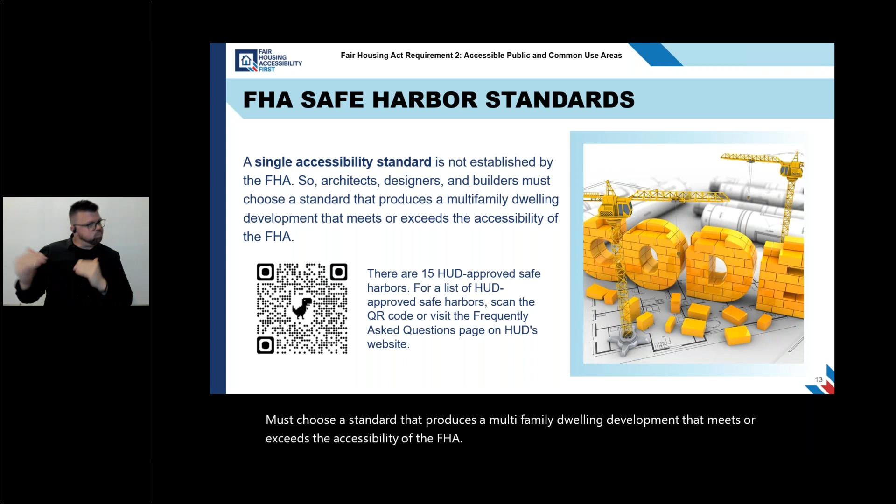FHA Safe Harbor Standards. A single accessibility standard is not established by the FHA. So architects, designers, and builders must choose a standard that produces a multifamily dwelling development that meets or exceeds the accessibility of the FHA. Experienced building professionals employ verified and objective standards known as safe harbors to ensure compliance with the FHA.

There are 15 HUD-approved safe harbors. And for a list of HUD-approved safe harbors, scan the QR code or visit the Frequently Asked Questions page on HUD's website.

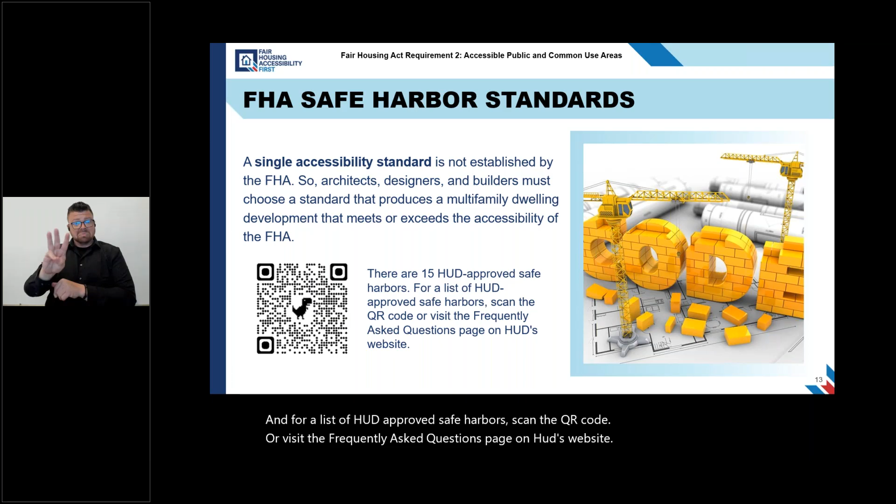Fair Housing Accessibility Guidelines. The intent of the FHA is realized by the 7 requirements of the Fair Housing Accessibility Guidelines, also referred to as the guidelines. The 7 requirements establish minimal levels of accessibility. They apply to covered multifamily dwellings designed and constructed for first occupancy after March 13th, 1991. Today's training focuses on the technical specifications in Requirement 2, accessible and usable public and common use areas.

The guidelines establish ANSI A117.1, 1986 version, as a minimum standard to comply with when designing these areas. The Fair Housing Act Design Manual, page 2.4, includes a chart that identifies ANSI scoping specifications for public and common use elements and spaces that must be accessible.

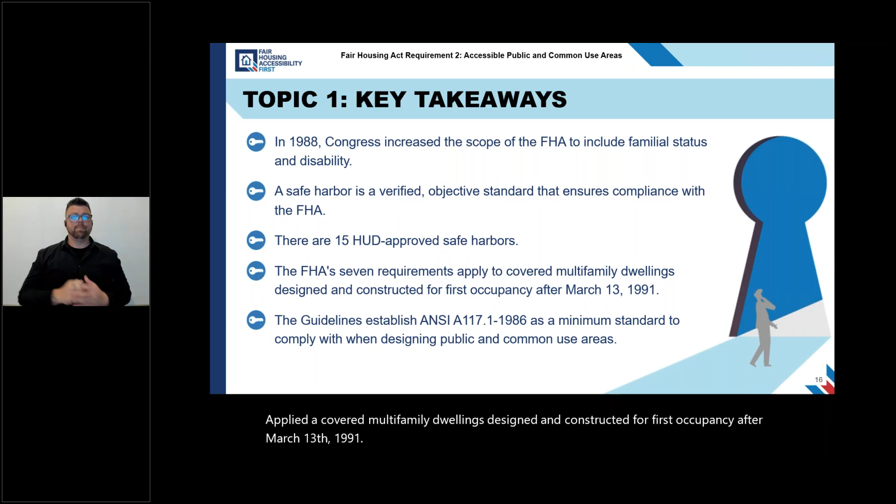And lastly, the guidelines establish ANSI A117.1-1986 as a minimum standard to comply with when designing public and common use areas. And with that, it's going to take us into topic 2, what's covered in requirement 2.

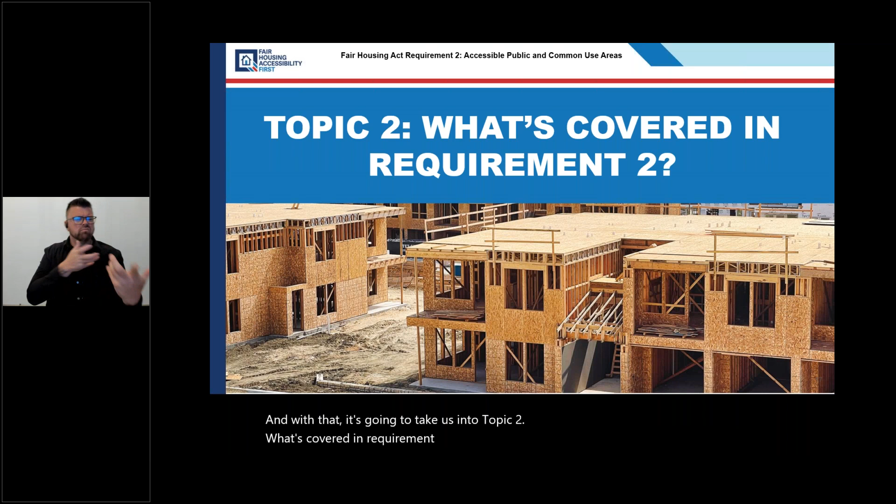What's covered? Entrances and routes. Requirement 2 ensures that individuals with mobility challenges can access all the public and common use spaces on an FHA covered site. The benefits of requirement 2 rely on the specifications in requirement 1 and can only be fully realized if buildings on a site have an accessible entrance on an accessible route.

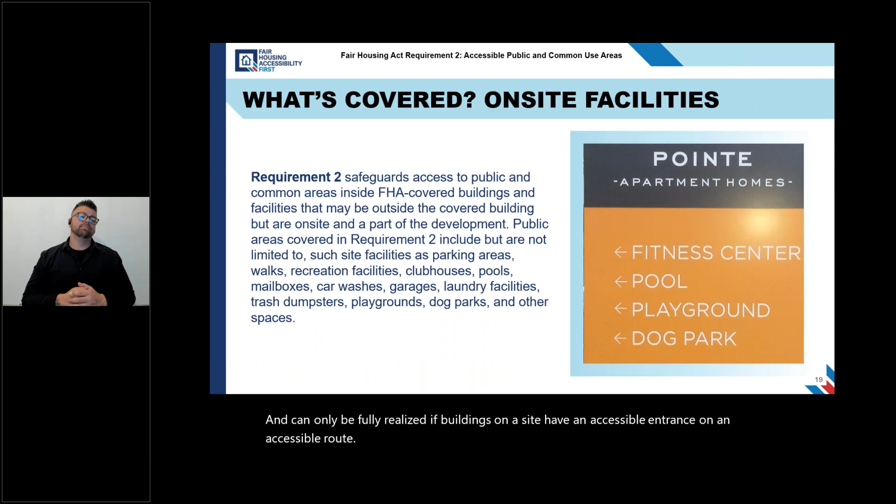What's covered? On-site facilities. Requirement 2 safeguards access to public and common areas inside FHA covered buildings and facilities that may be outside the covered building but are on site and a part of the development. Public areas covered in requirement 2 include, but are not limited to, such site facilities as parking areas, walks, recreation facilities, clubhouses, pools, mailboxes, car washes, garages, laundry facilities, trash dumpsters, playgrounds, dog parks, and other spaces.

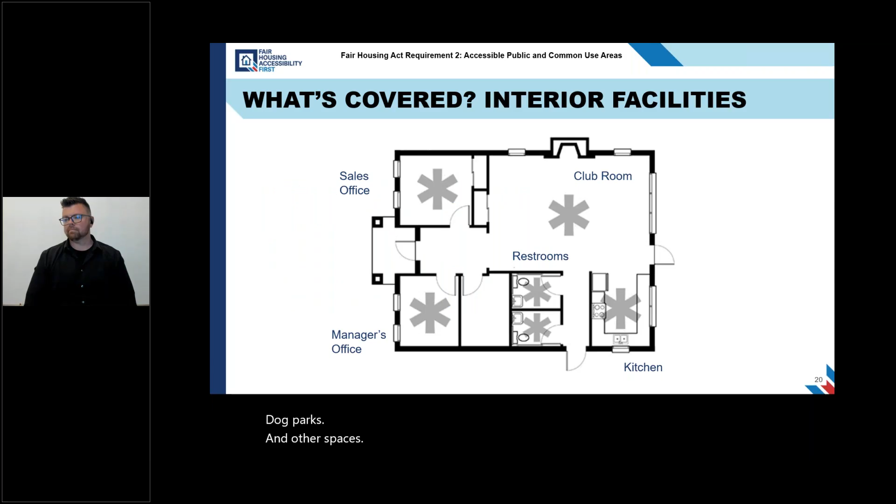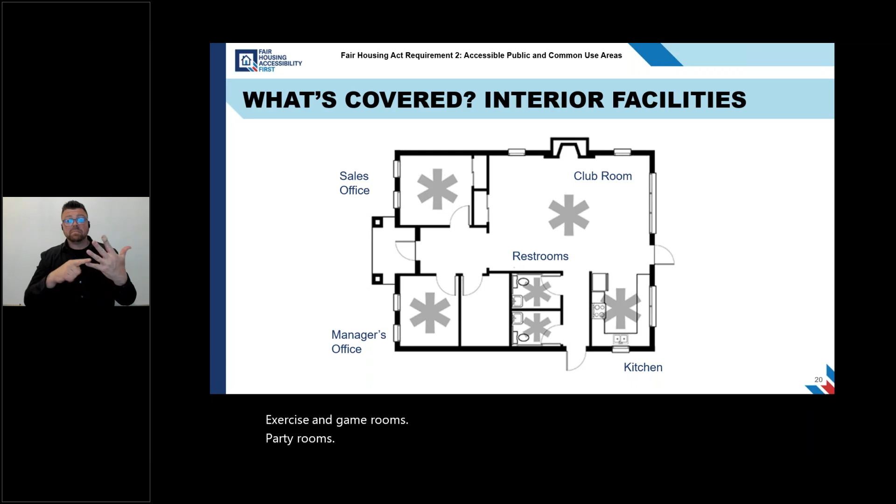What's covered? Interior facilities. Public and common use areas include interior facilities such as rental offices, toilet and bathing rooms, exercise and game rooms, party rooms, kitchens, office centers, and other spaces.

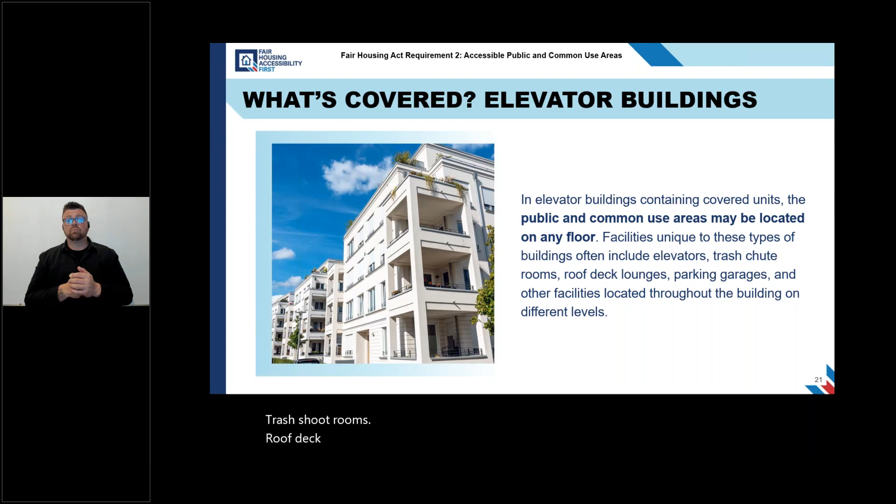What's covered? Elevator buildings. In elevator buildings containing covered units, the public and common use areas may be located on any floor. Facilities unique to these types of buildings often include elevators, trash chute rooms, roof deck lounges, parking garages, and other facilities located throughout the building on different levels.

Residential housing with 2- and 3-story walk-up type buildings with single-story dwellings on the ground floor, only the ground floor dwellings are covered and must comply with the accessibility requirements. Since the upper floors in these types of developments are typically not served by an accessible route, public and common use areas, including the stairs going up, the halls, corridors, breezeways, and the entry doors on the upper levels are not covered.

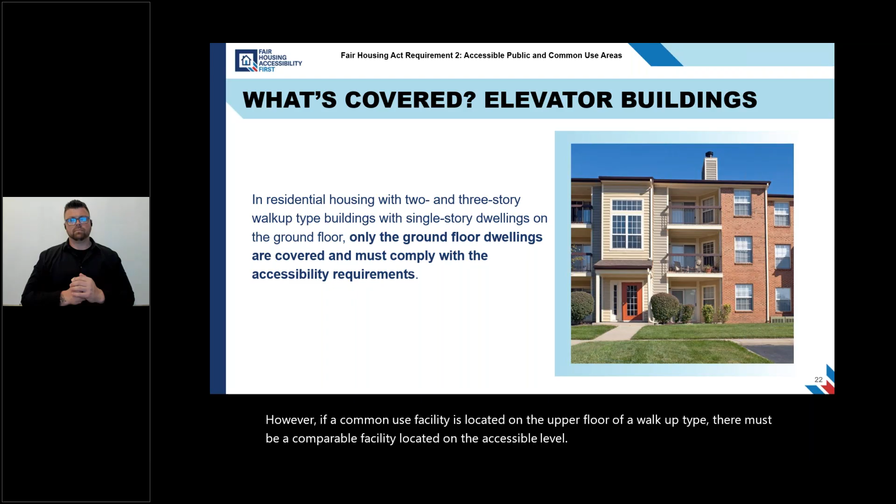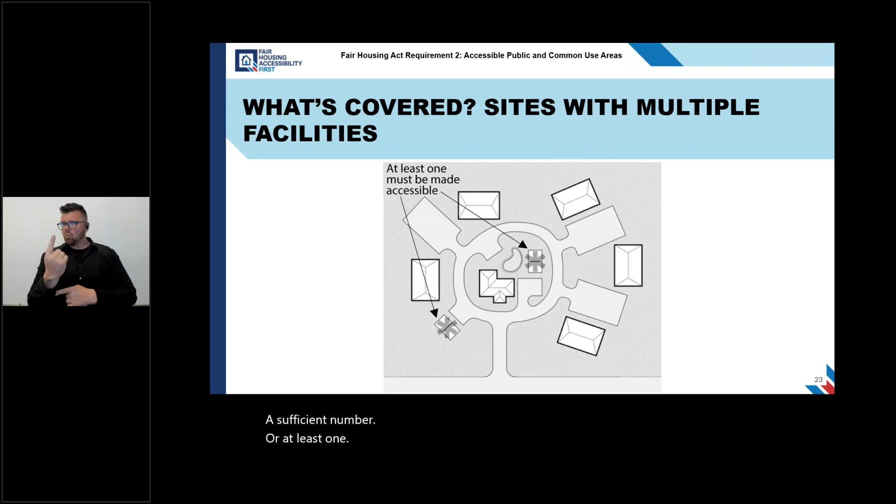However, if a common use facility is located on the upper floor of a walk-up type, there must be a comparable facility located on the accessible level. What's covered? Sites with multiple facilities. On a site where multiple public and common use facilities occur, a sufficient number, or at least one, of accessible facilities of each type must be made accessible to ensure equal opportunity for use by persons with disabilities.

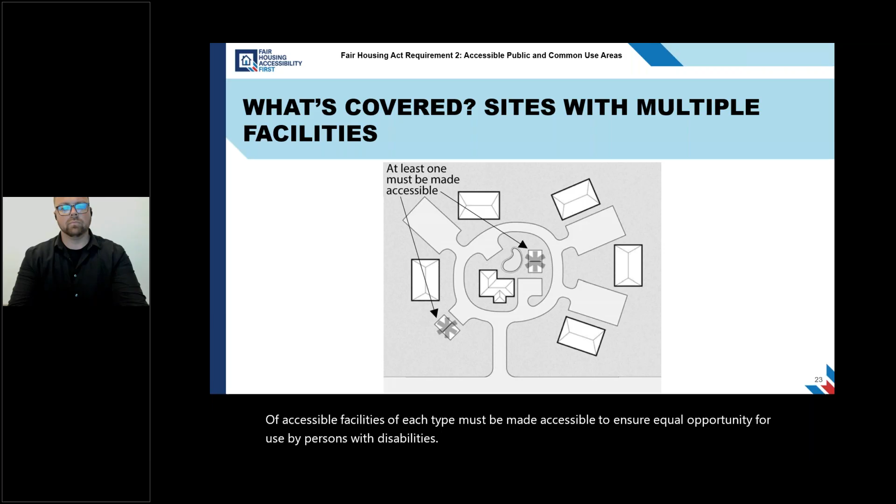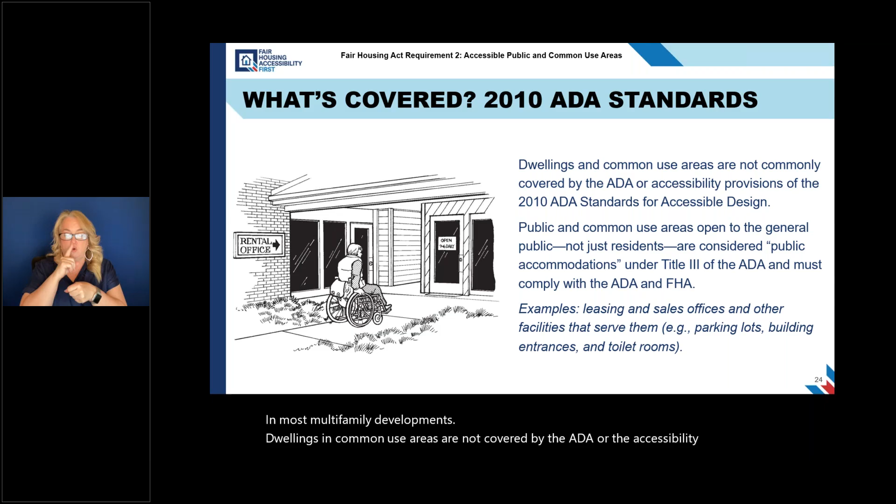More detail. What's covered? 2010 ADA standards. In most multifamily developments, dwellings and common use areas are not covered by the ADA or the accessibility provisions of the 2010 ADA standards for accessible design. However, portions of public and common use areas that are open to the general public and not just to residents of the development are considered public accommodations under Title III of the ADA and would have to comply with the ADA and FHA.

Examples of such common use areas are leasing and sales offices and the other facilities that serve them, such as parking lots, building entrances, and toilet rooms. When designing a feature to which both the FHA and ADA apply, check both applicable standards and choose the standard that provides the most accessibility.

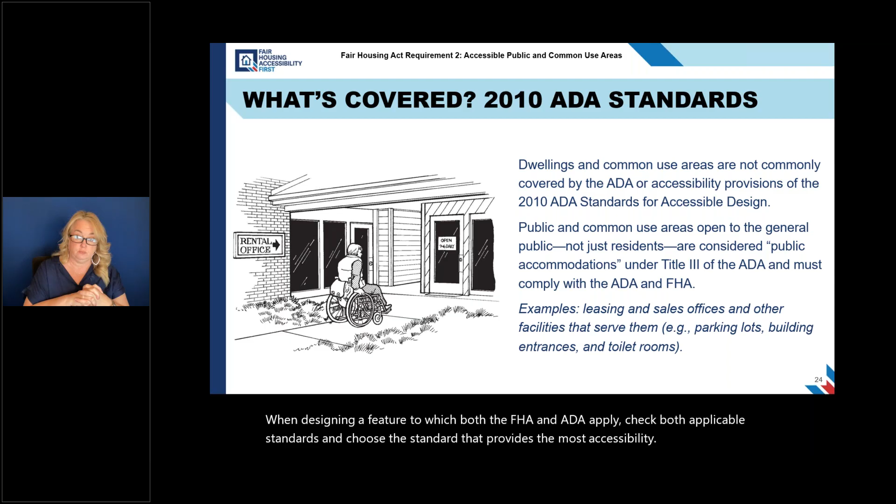And that leads us to our second knowledge check, which reads, portions of public and common use areas open to the general public must comply with which? First option, FHA and ICC. Second option, ADA and FHA. And the third option, ADA and ICC. I'll go ahead and launch this poll.

And again, this knowledge check reads, portions of public and common use areas open to the general public must comply with which disability rights law? First option, FHA and ICC. Second option, ADA and FHA. And the third option, ADA and ICC. All right, we'll give folks a few more moments to get those selections in. All right, thank you so much. Go ahead and close that poll.

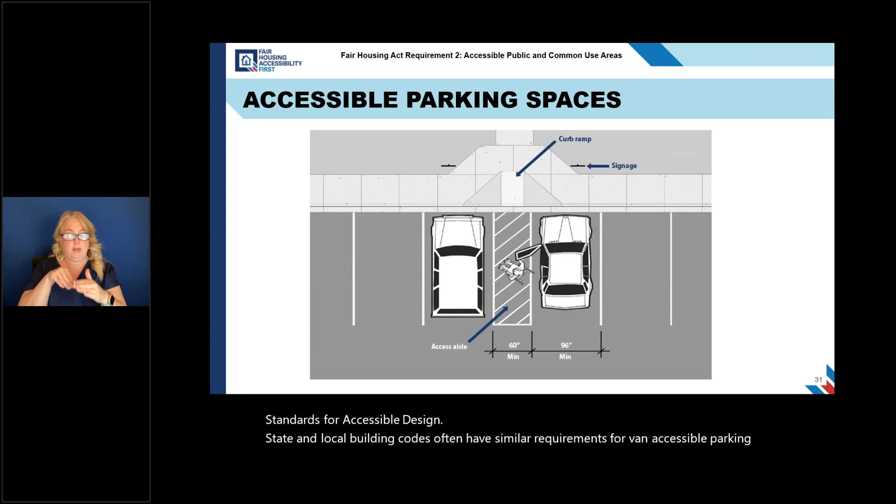Resident parking. In the provisions of Requirement 2 in the guidelines, minimum levels of accessible parking are established. For residents, 2% of parking spaces serving covered dwelling units and upon request by persons with disabilities. A minimum of one accessible space at each site facility where parking is provided, such as recreational facilities.

Visitor parking. For visitors, a sufficient number of spaces to provide access to grade level entrances of covered multifamily dwellings should be provided. A minimum of one space at a sales or rental office should be provided.

A sufficient number can be established by examining the total number of visitor parking spaces provided compared to the total size of a project. A one space minimum is required, but more should be provided if a large amount of visitor parking is provided for residents' benefit.

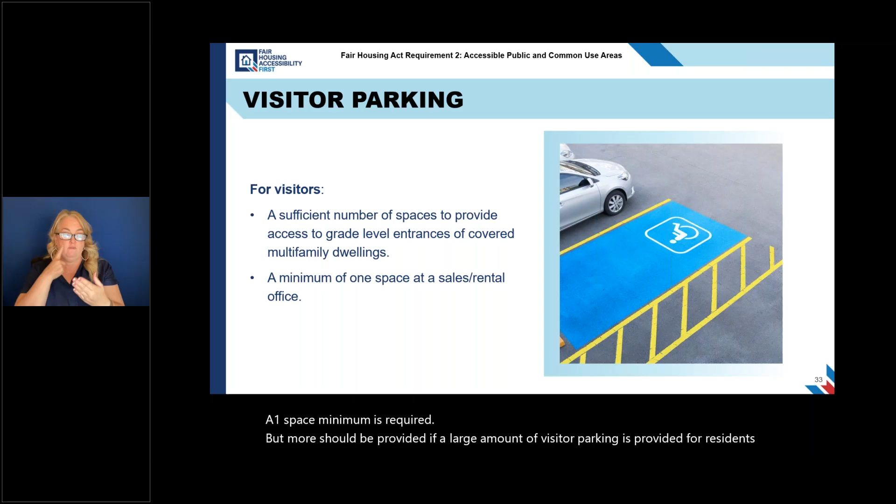And with that, we go into knowledge check 3, which reads, ANSI requires a 96-inch wide accessible parking space for parking for each site facility. The first option is true, and the second option is false. So go ahead and launch this poll. And again, this reads, ANSI requires a 96-inch wide accessible parking space for parking for each site facility. First option is true, second option is false.

All right, give a few more moments to get your selections in. All right, go ahead and close this poll. Thank you so much.

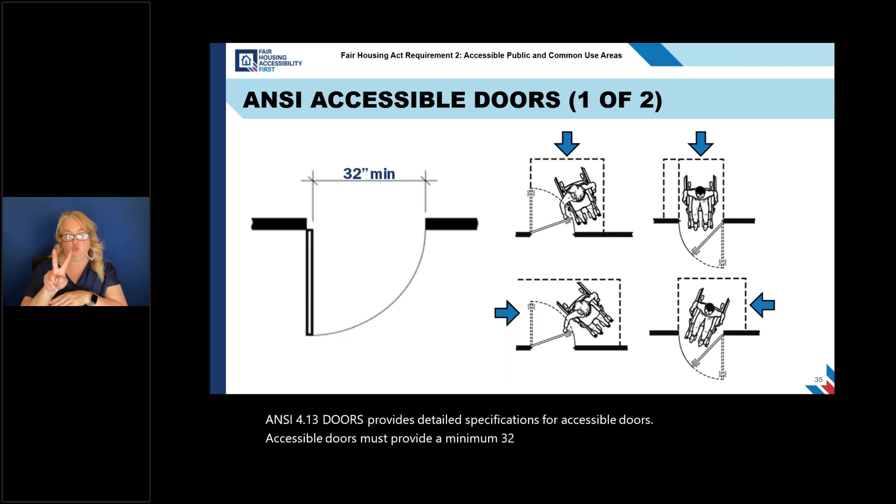ANSI, accessible doors. ANSI 4.13, doors, provides detailed specifications for accessible doors. Accessible doors must provide a minimum 32-inch clear opening measured between the face of the door and the opposing doorstop when the door is open 90 degrees. Accessible doors must provide maneuvering clearances that vary depending on the approach. Accessible doors must also meet threshold, hardware, and opening force requirements.

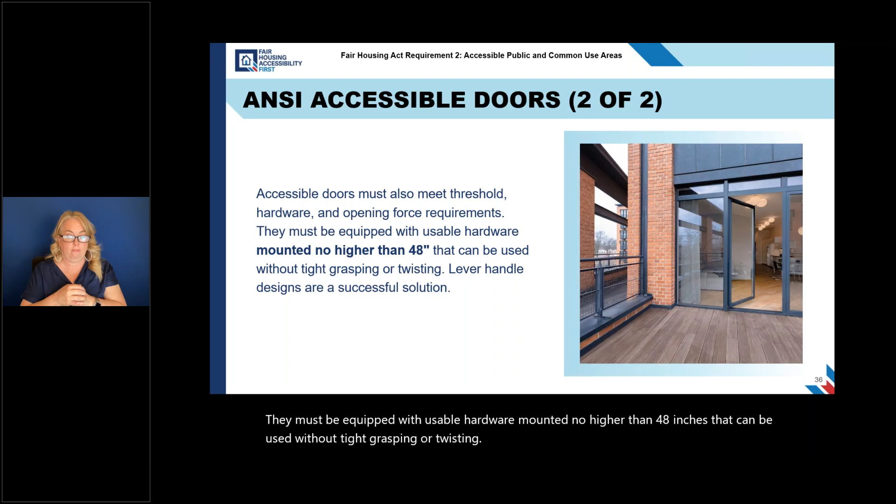They must be equipped with usable hardware mounted no higher than 48 inches that can be used without tight grasping or twisting. Lever handle designs are a successful solution. Recommendations for accessible doors include, but are not limited to, easy to read, permanent room signage with tactile characters, a side light or glass panel to assure the pathway is clear, and an optional auxiliary handle to aid in closing the door if it does not automatically close.

The door should swing easily with no closer. The force to open a door is limited by the requirement of 5 pounds for interior doors and 8.5 pounds for exterior doors.

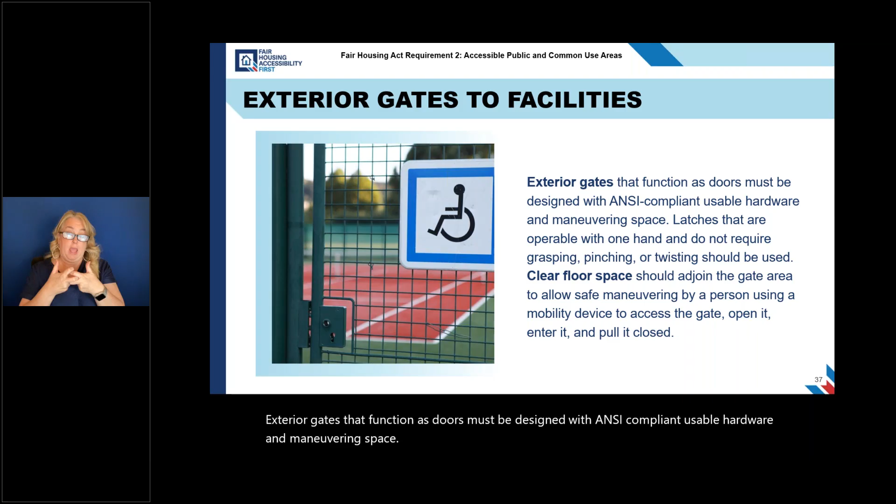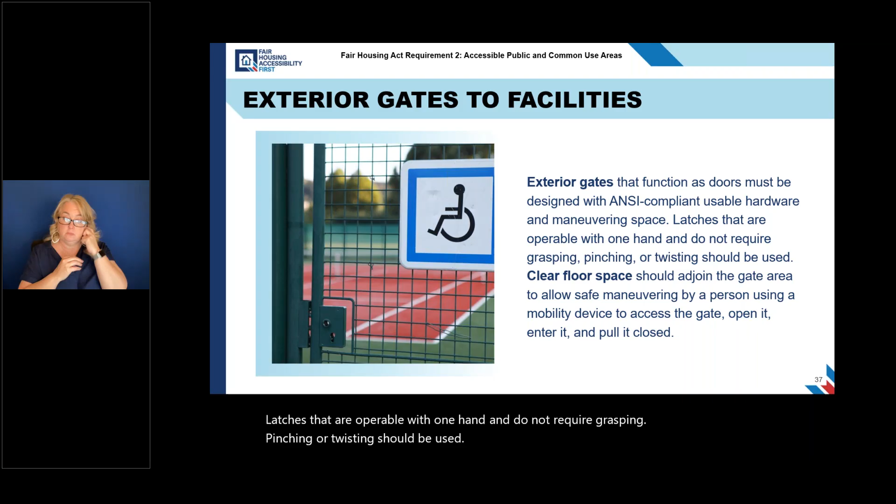Exterior gates to facilities. Exterior gates that function as doors must be designed with ANSI compliant, usable hardware and maneuvering space. Latches that are operable with one hand and do not require grasping, pinching, or twisting should be used. Clear floor space should adjoin the gate area to allow safe maneuvering by a person using a mobility device to access the gate, open it, enter it, and pull it closed.

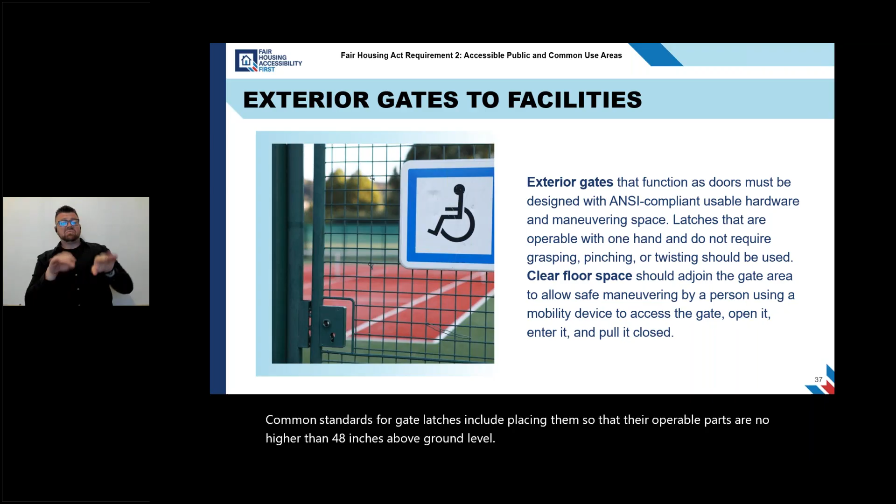Common standards for gate latches include placing them so that their operable parts are no higher than 48 inches above ground level. Some standards allow a height of 54 inches above the ground level at gates to swimming pools.

Laundry facilities. Laundry facilities must be on an accessible route in an accessible area. Where there are laundry rooms that serve each floor of an elevator building, each laundry room must be accessible. Likewise, where there is one laundry room on a ground floor in each building, each must be accessible.

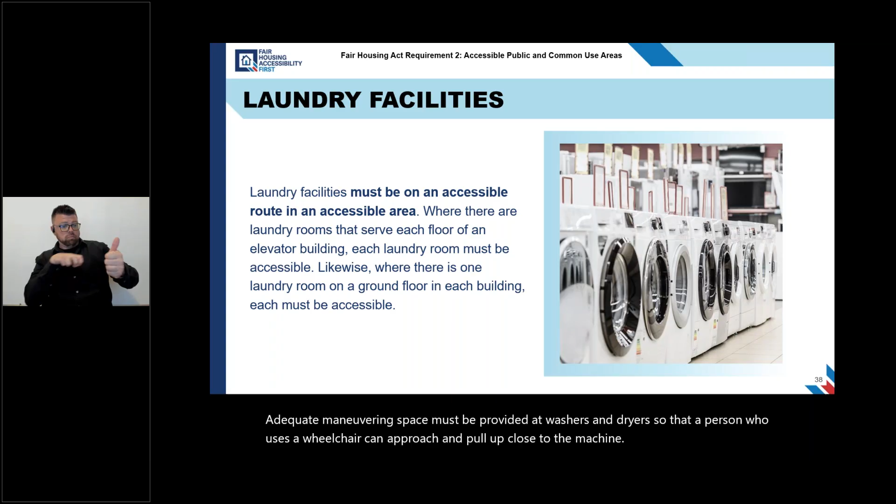Although front-loading machines are not required, adequate maneuvering space must be provided at washers and dryers so that a person who uses a wheelchair can approach and pull up close to the machine. The washer and dryer must have controls, including coin slots, within the reach range of a seated user. Please refer to the Fair Housing Act Design Manual, page 2.26 for more details.

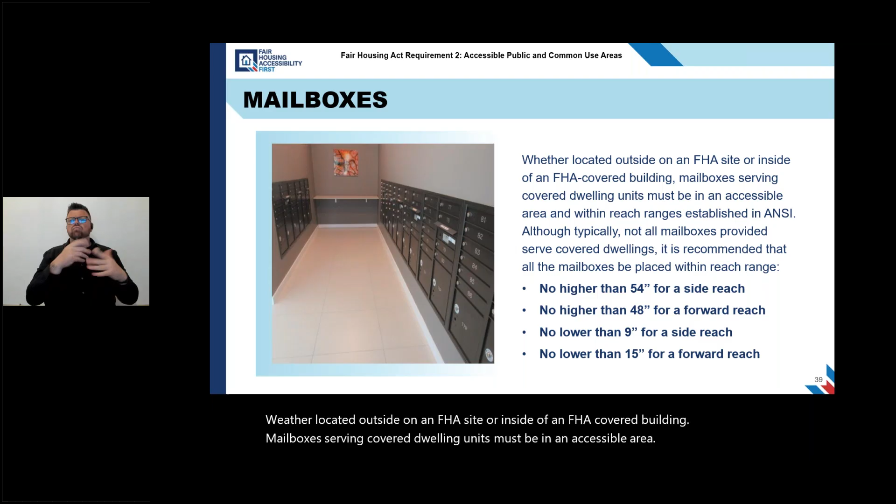Mailboxes. Whether located outside on an FHA site or inside of an FHA covered building, mailboxes serving covered dwelling units must be in an accessible area and within reach ranges established in ANSI. Although typically not all mailboxes serve covered dwellings, it is recommended that all the mailboxes be placed within reach range.

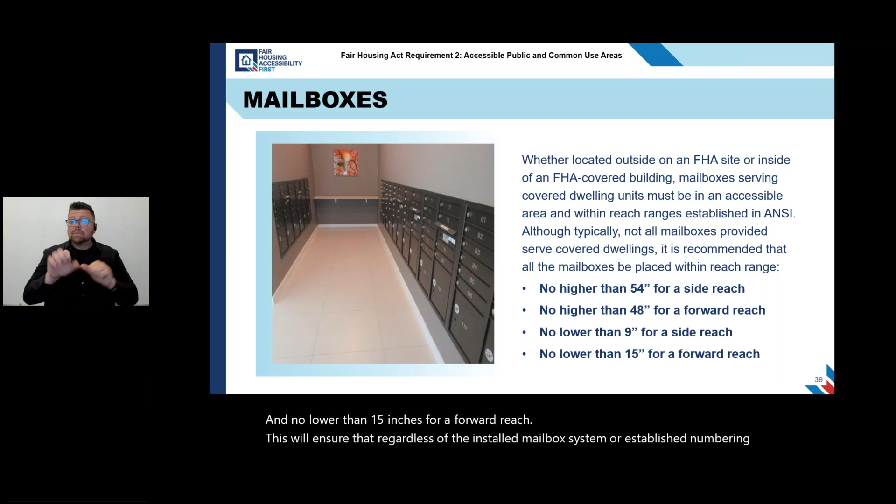That means no higher than 54 inches for a side reach, no higher than 48 inches for a forward reach, no lower than 9 inches for a side reach, and no lower than 15 inches for a forward reach. This will ensure that regardless of the installed mailbox system or established numbering system, mailboxes serving ground floor dwellings will be in an accessible area.

Exercise rooms. When an exercise room is provided for residents, care must be taken to ensure that at least one of each type of exercise device is on an accessible route, and that there is an accessible route around all equipment placed in the room.

Swimming pools. Access must be provided to the pool deck and apron area when there is a swimming pool. The guidelines do not require an accessible route, which would be a ramp or a lift, down into pool water. Builders and owners should check ADA standards for pools.

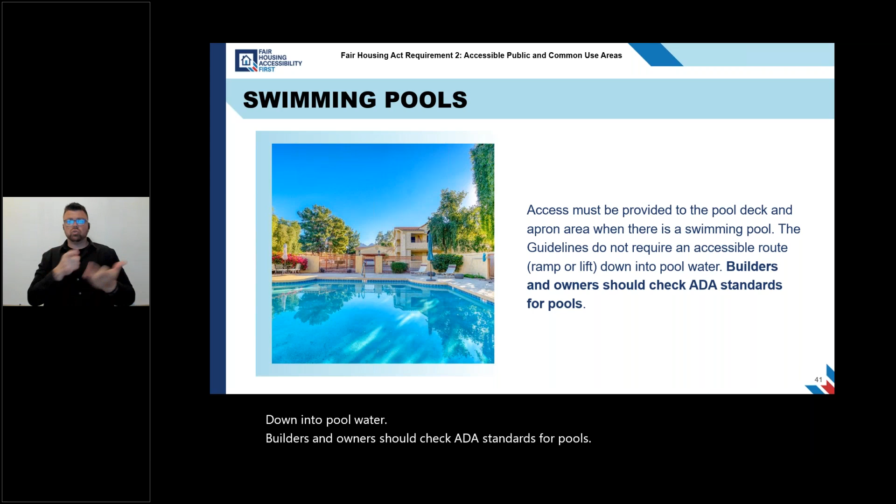Recreation areas. The routes to areas inside playgrounds, game rooms, craft, or lounge areas must be accessible. When there are tables, counters, or work surfaces, one of each must be accessible, have knee space, and be mounted at 34 inches maximum above the floor.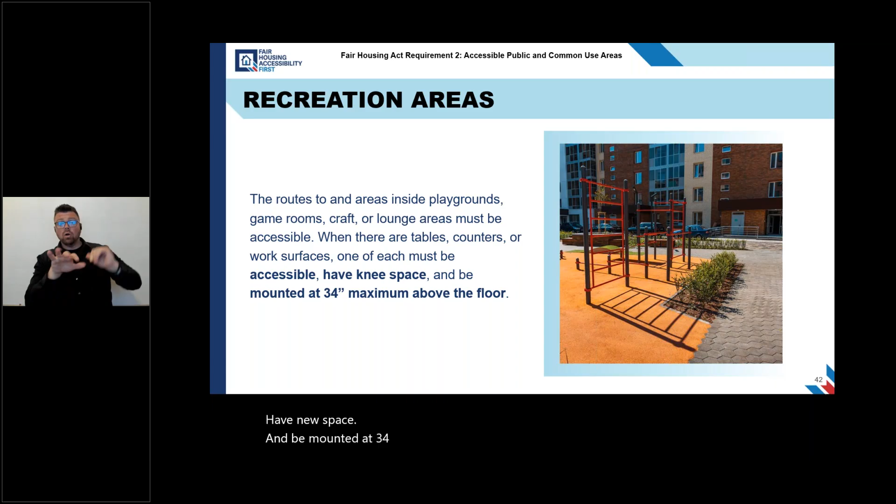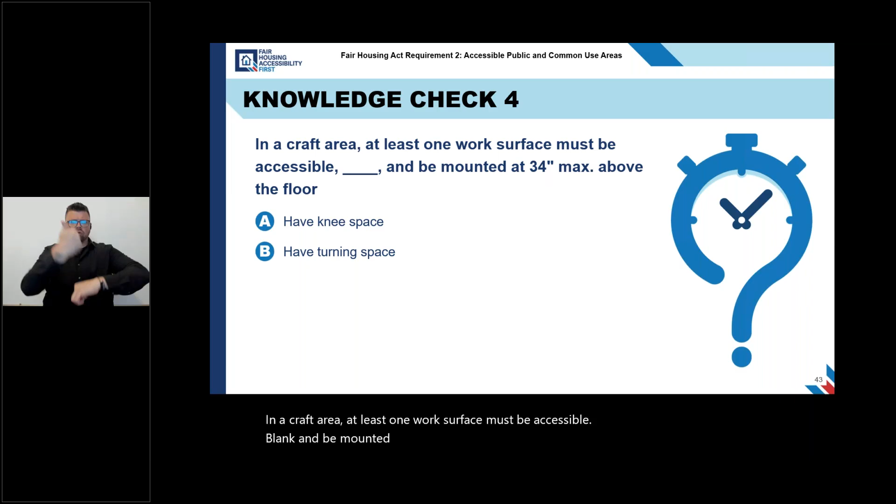And this brings us to our fourth knowledge check, which reads, in a craft area, at least one work surface must be accessible, blank, and be mounted at 34 inches max above the floor. The first option, have knee space, and the second option, have turning space. So we'll go ahead and launch this poll.

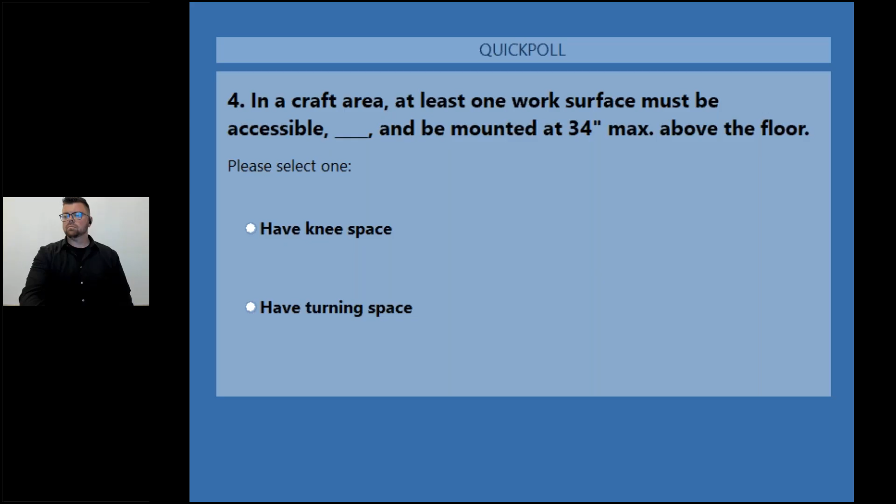And again, this knowledge check reads, in a craft area, at least one work surface must be accessible, blank, and be mounted at 34 inches maximum above the floor. The first option, have knee space, and the second option, have turning space. All right, give a few more moments to get your selections in. All right, go ahead and close this poll. Thank you so much.

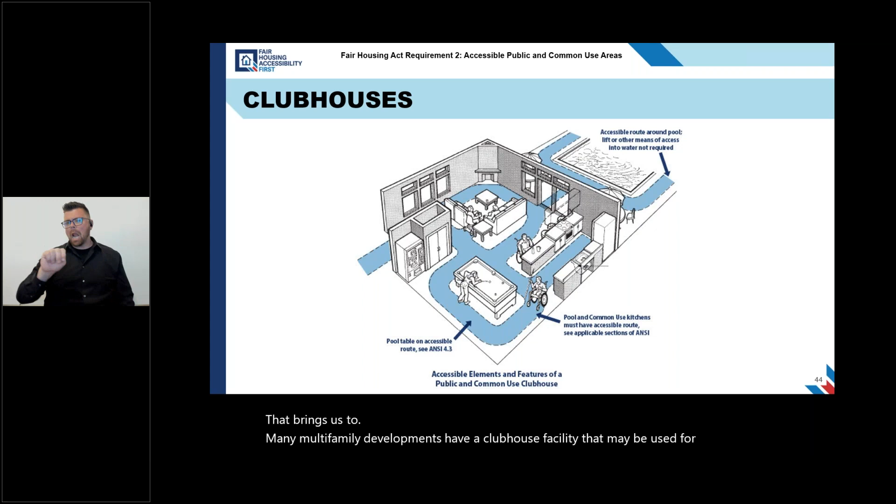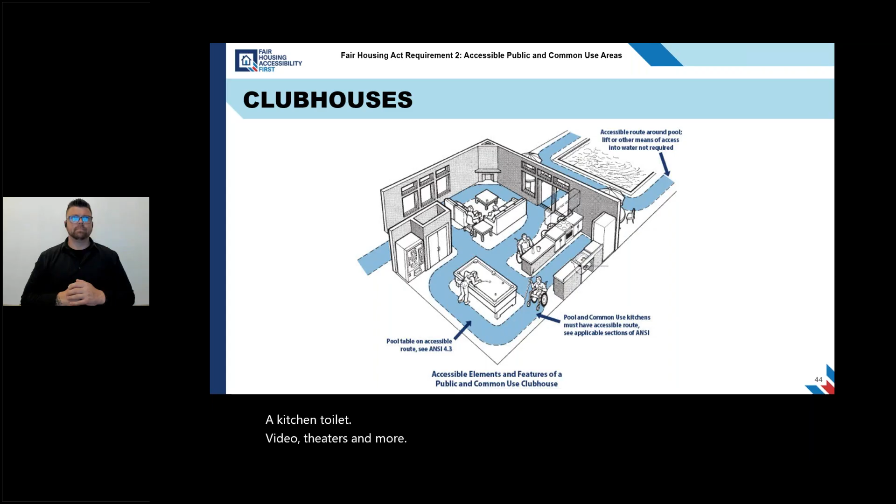That brings us to clubhouses. Many multifamily developments have a clubhouse facility that may be used for various activities. Typically, a clubhouse might include a multi-purpose room, a kitchen, toilet, video theaters, and more. All public and common use areas and amenities within a clubhouse facility must be accessible and on an accessible route. Whenever multiple features or facilities are provided, sufficient accessible features of each type must be provided.

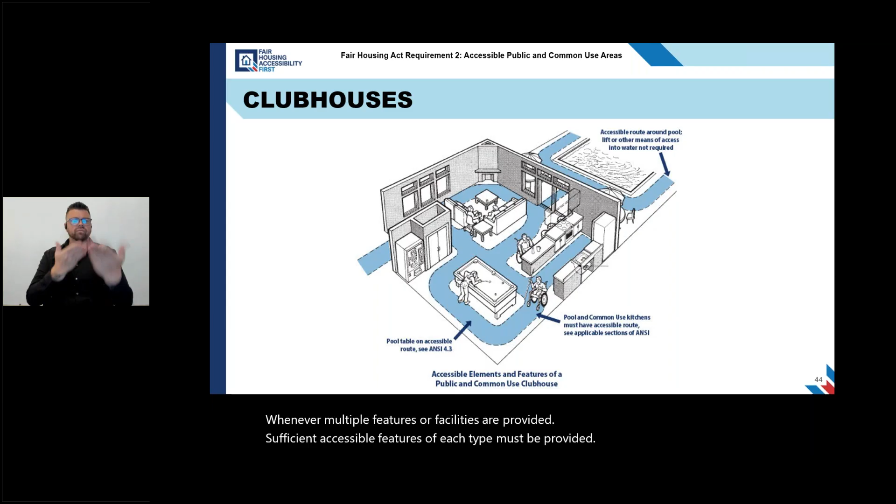Multiple recreational facilities. When multiple recreational amenities, such as tennis courts, playgrounds, or spas are provided within the same development, the guidelines state that access to at least one or a sufficient number must be provided. For example, if there were 4 tennis courts, one would have to be accessible. However, if these were not in a central location, say 2 were clustered together to serve one part of a complex, and 2 others were clustered to serve the other part, then one in each cluster would need to be accessible.

The number determined to be sufficient must ensure an equitable opportunity for use by people with disabilities. It is recommended that all recreational facilities are accessible when the site is relatively flat, and this can be easily achieved.

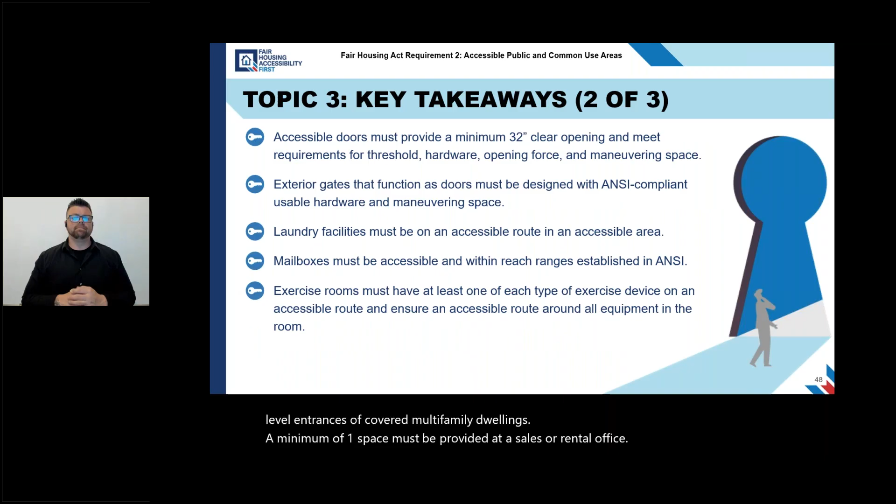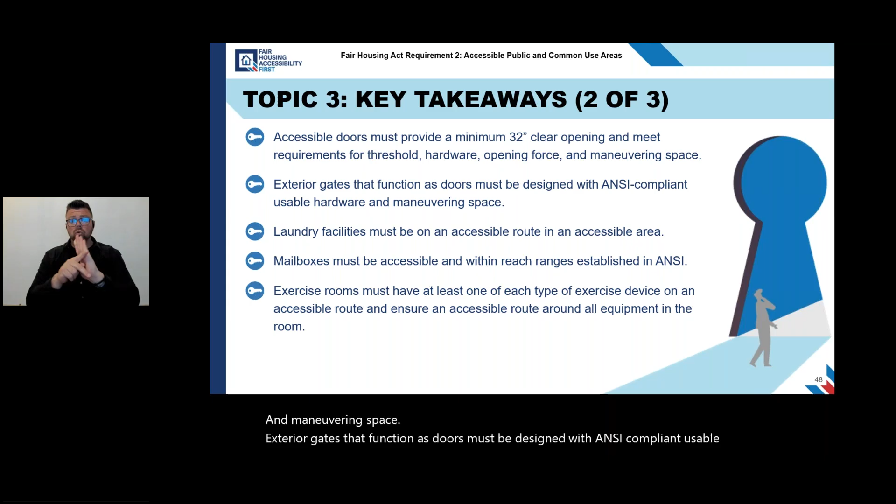Accessible doors must provide a minimum 32-inch clear opening and meet requirements for threshold, hardware, opening force, and maneuvering space. Exterior gates that function as doors must be designed with ANSI compliant usable hardware and maneuvering space. Laundry facilities must be on an accessible route in an accessible area. Mailboxes must be accessible and within reach ranges established in ANSI.

Exercise rooms must have at least one of each type of exercise device on an accessible route and ensure an accessible route around all equipment in the room. The routes to areas inside playgrounds, game rooms, craft, or lounge areas must be accessible. In game rooms, craft, or lounge areas, if there are tables, counters, or work surfaces, one of each must be accessible, have knee space and be mounted at 34 inches maximum above the floor.

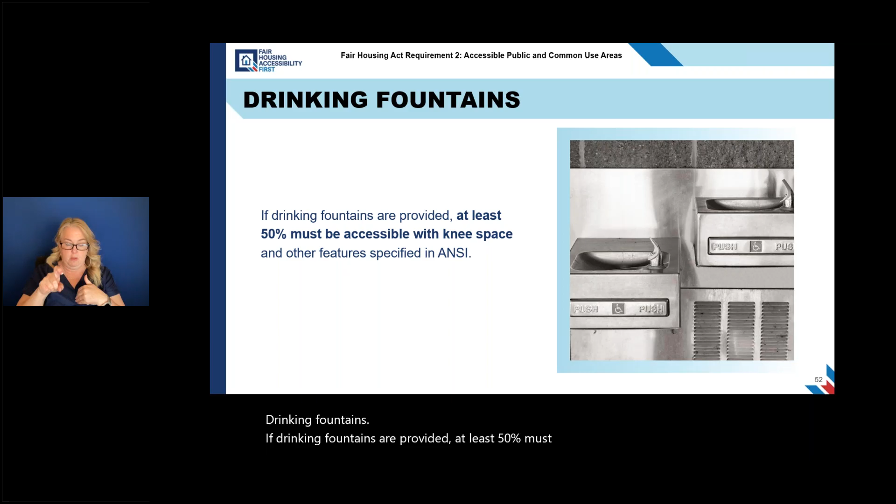Interior facilities. Many public and common use spaces are located inside FHA covered buildings and have features that must be accessible for persons with disabilities. Drinking fountains. If drinking fountains are provided, at least 50% must be accessible with knee space and other features specified in ANSI.

Workstations. When office centers are provided, there must be accessible workstations. One of each device, such as a fax machine, phone, computer, etc., must be on an accessible route and be placed at a workstation that is accessible.

Sections of ANSI that could be used for guidance in designing accessible workstations are Section 4.2, Space Allowances and Reach Ranges, Section 4.2.4, Clear Floor or Ground Space, and Section 4.30, Seating, Tables and Work Surfaces.

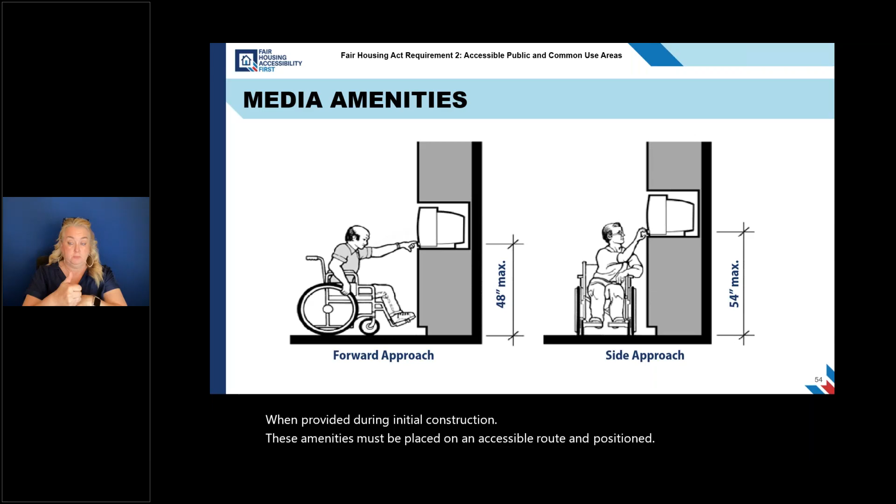Media amenities. Media items such as stereos, video monitors, and TV equipment are frequently provided in clubhouse facilities for residents' enjoyment and use. When provided during initial construction, these amenities must be placed on an accessible route and positioned so their operable controls are within ANSI compliant reach ranges.

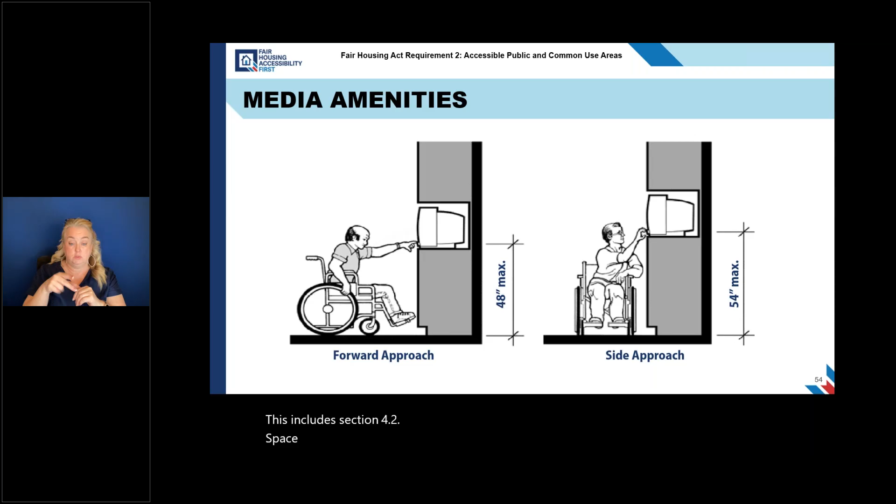For a forward approach, the maximum height is 48 inches above the finished floor. And for a side approach, the maximum height is 54 inches. Designers must also refer to other applicable performance specifications of ANSI that may apply. This includes Section 4.2, Space Allowances and Reach Ranges, Section 4.3, Accessible Routes, and Section 4.4, Protruding Objects.

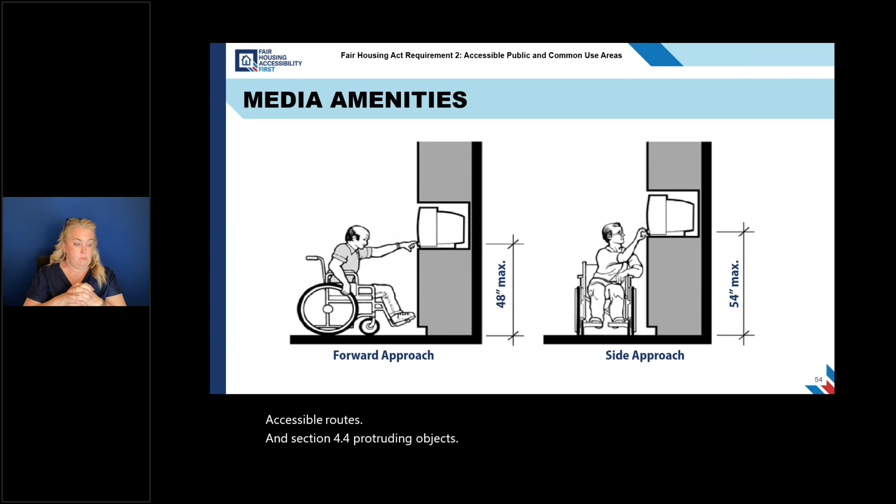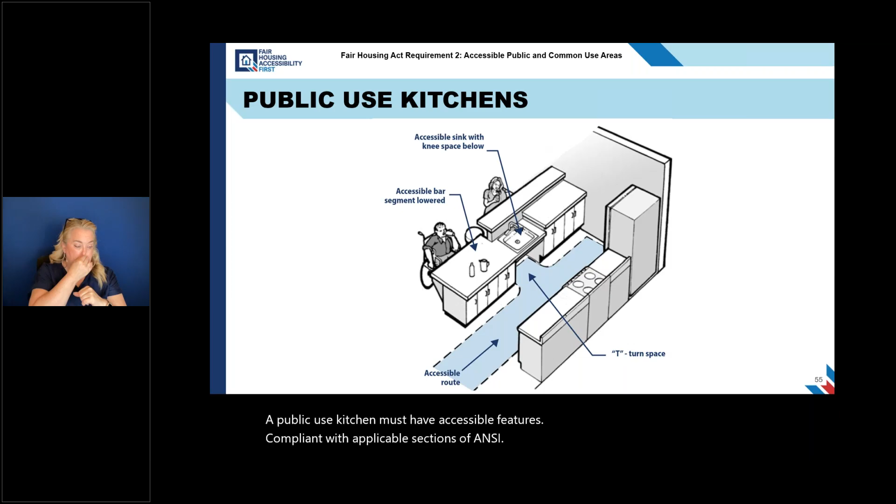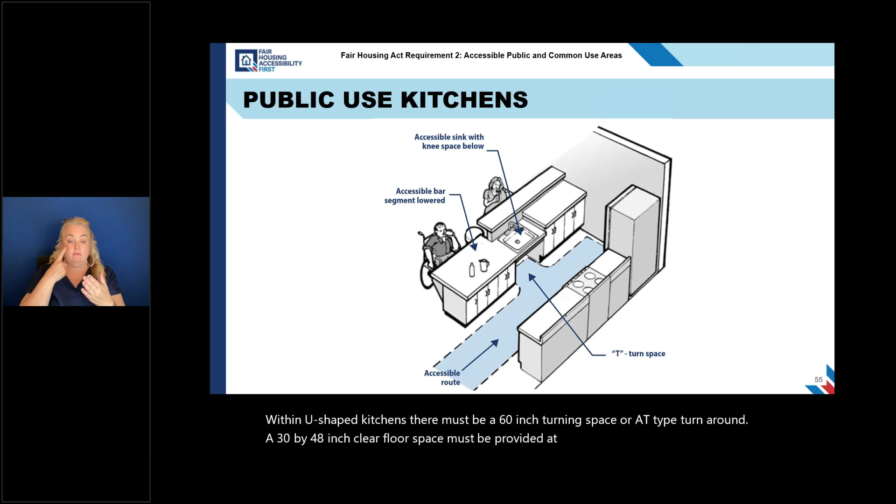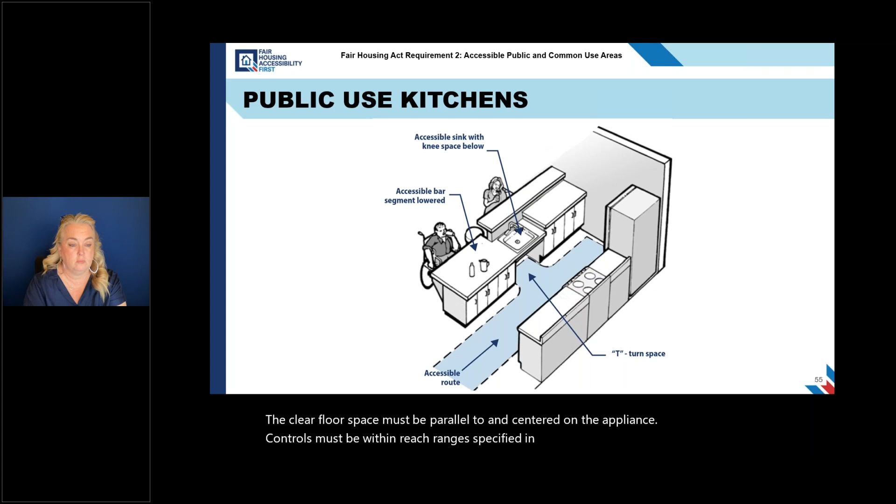Public use kitchens. A public use kitchen must have accessible features compliant with applicable sections of ANSI. Within U-shaped kitchens, there must be a 60-inch turning space or a T-type turnaround. A 30 by 48-inch clear floor space must be provided at ranges and cooktops in public kitchens. The clear floor space must be parallel to and centered on the appliance. Controls must be within reach ranges specified in ANSI, including the switch for the overhead hood if one is provided.

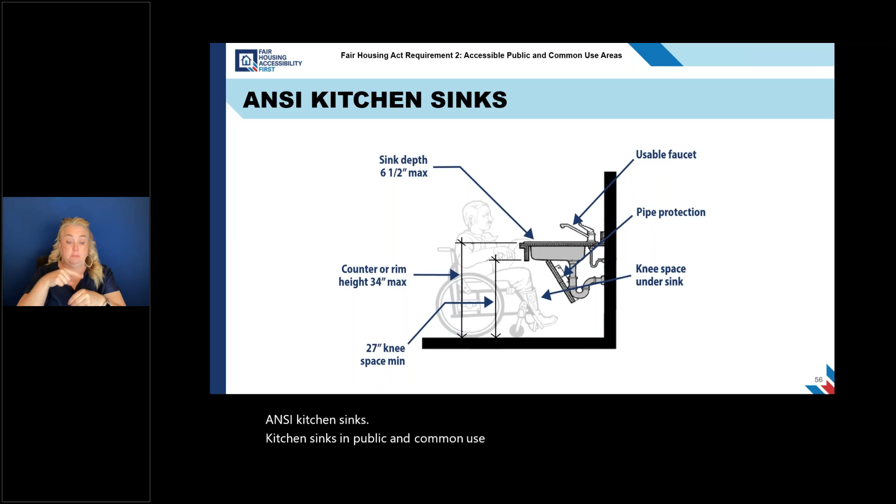ANSI kitchen sinks. Kitchen sinks in public and common use areas must comply with the applicable sections of ANSI 4.19. This includes lavatories, sinks, and mirrors. Key features of a compliant kitchen sink include a counter or rim height no higher than 34 inches, a maximum sink depth of 6.5 inches, a 30 by 48 inch clear floor space to allow a forward approach to the sink, which shall adjoin an accessible route and extend a maximum of 19 inches underneath the lavatory.

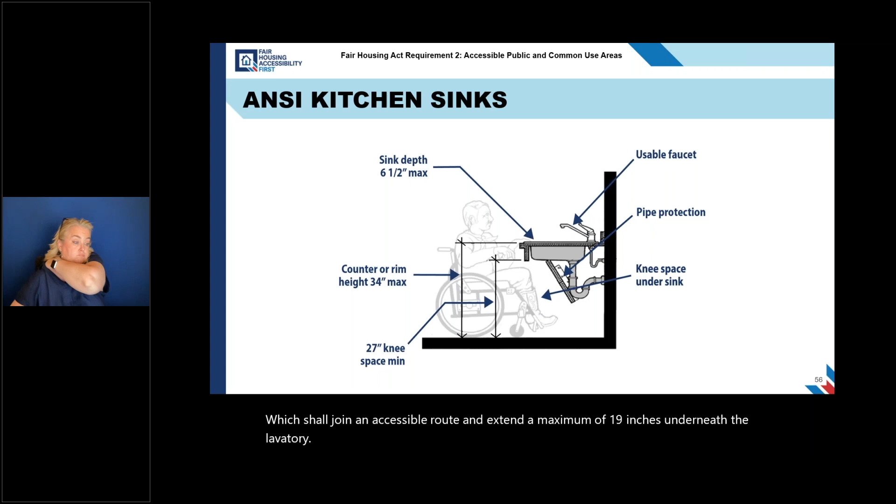Faucets must be usable without tight grasping or twisting. Hot water and drain pipes must be insulated or protected for safety.

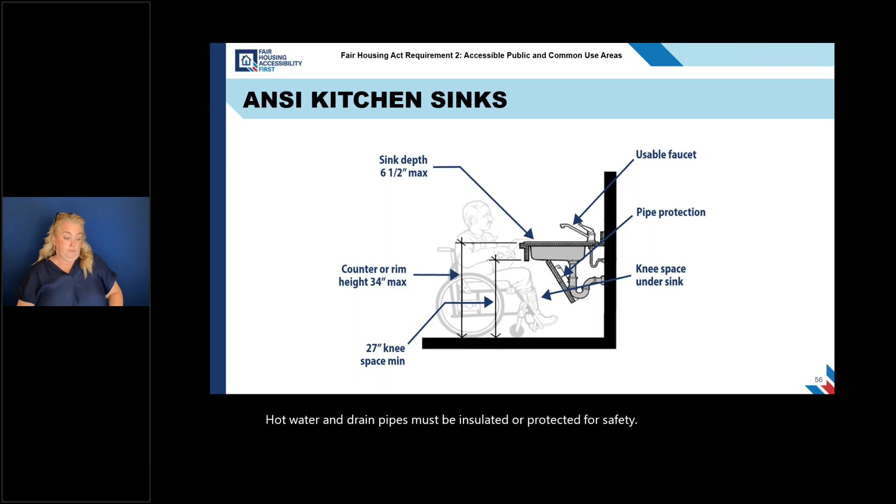And that brings us to knowledge check 5, which reads: if drinking fountains are provided, at least blank must be accessible with knee space and other features specified in ANSI. The first option, 25%, the second option, 50%, and the third option, 75%. So I'll go ahead and launch this poll. And I'll give folks a few more moments to get their selections in. All right, go ahead and close this poll.

Thank you so much. And that leads us into our 6th knowledge check. A public use U-shaped kitchen must have a blank turning space or a T-type turnaround. The first option, 40 inches. Second option, 50 inches. And the third option, 60 inches. So let's go ahead and launch this poll. All right, a few more seconds to get those answers submitted. All right, go ahead and close this poll.

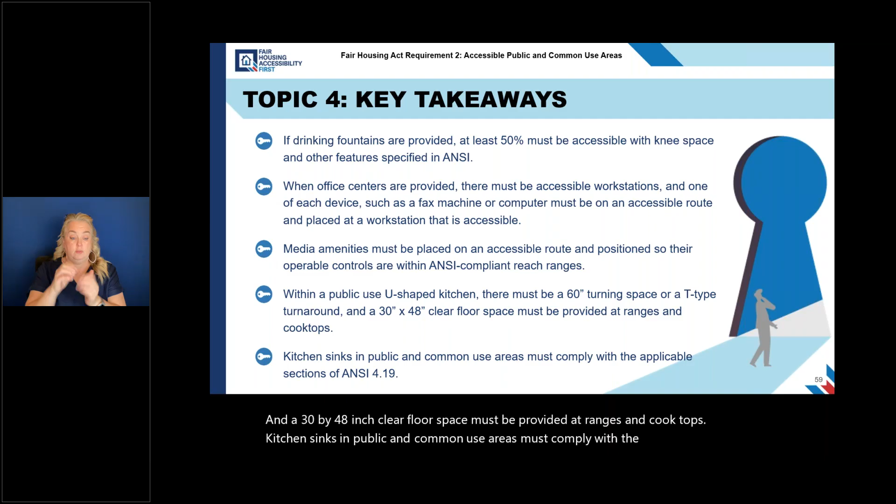Within a public U-shaped kitchen, there must be a 60-inch turning space or a T-type turnaround, and a 30 by 48-inch clear floor space must be provided at ranges and cooktops. Kitchen sinks in public and common use areas must comply with the applicable sections of ANSI 4.19.

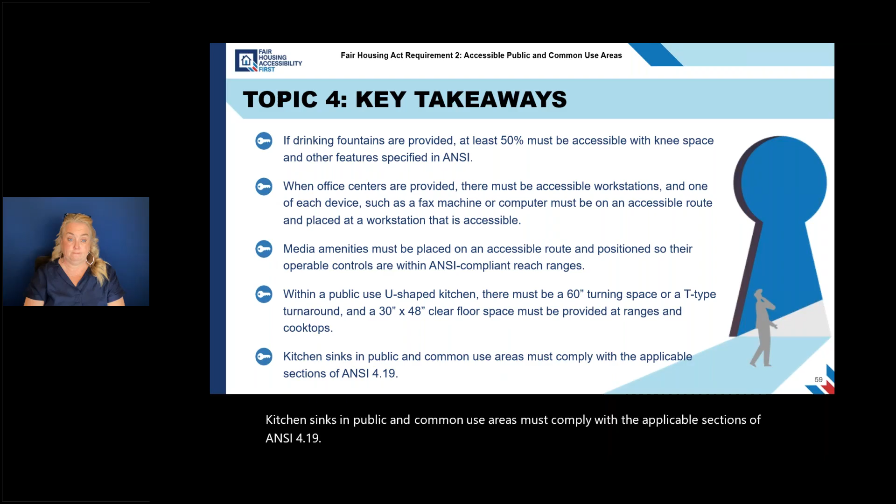And that brings us to our final topic, topic 5, personal hygiene and care spaces. FHA coverage applies to common and public spaces where individuals may need to manage their personal hygiene care. Though these areas are publicly used spaces, access and privacy are essential.

When designing accessible personal hygiene care spaces, there are two critical points to be mindful of. The first, the ease of use and safety of a person with a temporary or permanent disability. And the second, the extra space to accommodate a person who may be assisting a person who has a temporary or permanent disability. Experienced designers and builders recognize that increasing accessibility presents a more functional design and ensures compliance.

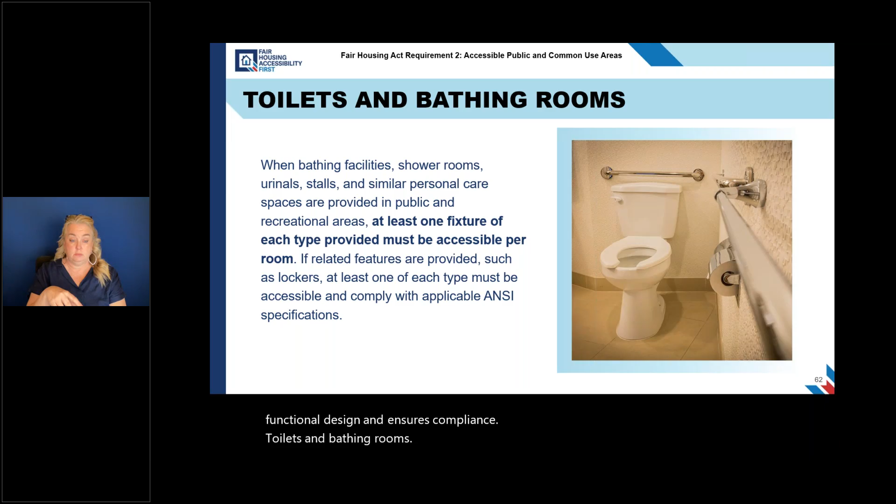Toilets and bathing rooms. When bathing facilities, shower rooms, urinals, stalls, and similar personal care spaces are provided in public or recreational areas, at least one fixture of each type provided must be accessible per room. If related features are provided, such as lockers, at least one of each type must be accessible and comply with applicable ANSI specifications.

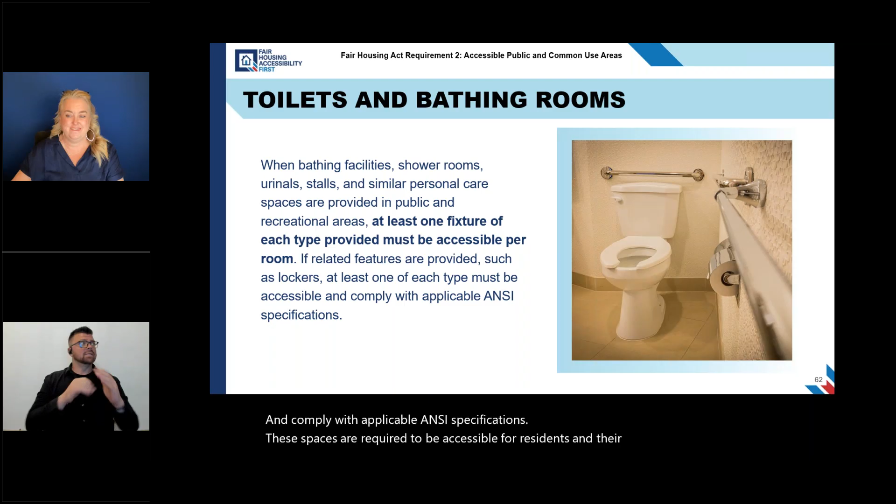These spaces are required to be accessible for residents and their guests. Although neither the guidelines nor ANSI contains specifications for showers or dressing rooms, such as those that may serve a swimming pool, newer versions of ANSI, such as the 1998 version, contain requirements for dressing rooms.

Accessible toilet rooms. Public toilet rooms must have knee space at sinks and pipe protection, grab bars for toilets mounted between 33 and 36 inches, but mounting them between 34 and 35 inches is recommended to allow a margin of error. Usable faucet handles, lever style that do not require gripping or twisting.

Mirrors mounted with the bottom reflective edge no higher than 40 inches above the finished floor. Paper towel dispensers, soap dispensers, coat hooks, and other accessories mounted no higher than 48 inches above the floor, but mounting them at 44 inches is recommended to ensure compliance.

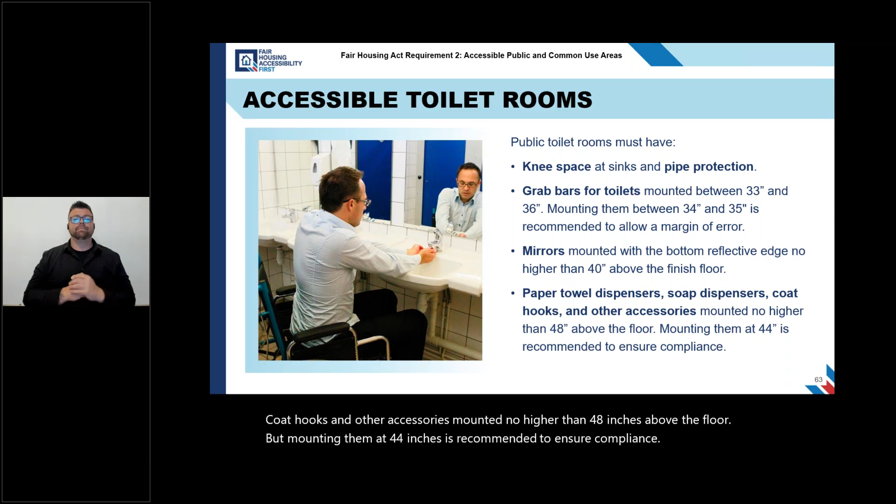Moving along to our next knowledge check. Which features must sinks in public toilet rooms have? The first option, knee space. The second option, pipe protection. Or the third option, both. So let's go ahead and launch this poll.

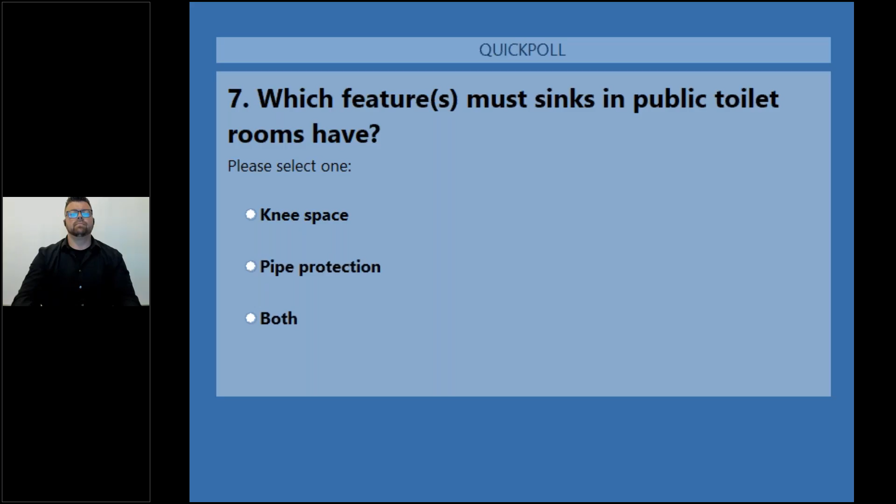And again, this reads, which features must sinks in public toilet rooms have? Your first option, knee space. Second option, pipe protection. Or the third option, both. All right, I'll give a few more moments to get your selections in. All right, go ahead and close this poll. Thank you so much. That actually leads us into our next knowledge check.

It is blank that grab bars in public toilet rooms be mounted between 34 and 35 inches. The first option, required, or the second option, recommended. So go ahead and launch this poll. And again, this reads, it is blank that grab bars in public toilet rooms be mounted between 34 and 35 inches. The first option is required, second option, recommended.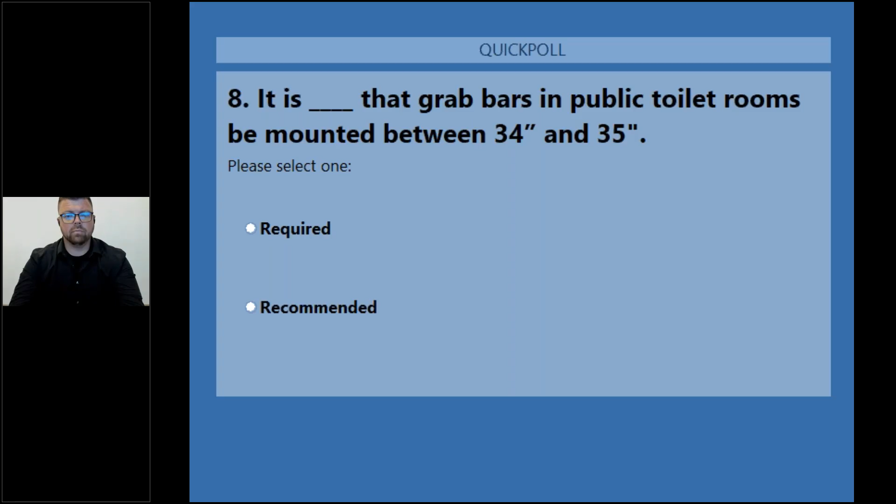Maneuvering spaces at toilets. Toilets in public and common use toilet rooms must comply with applicable clear floor space specifications in ANSI. The choices for designers include a 48 by 66 inch clear floor space for a front approach, a 48 by 56 inch clear floor space for a side approach, or a 60 by 56 inch clear floor space for a side or front approach.

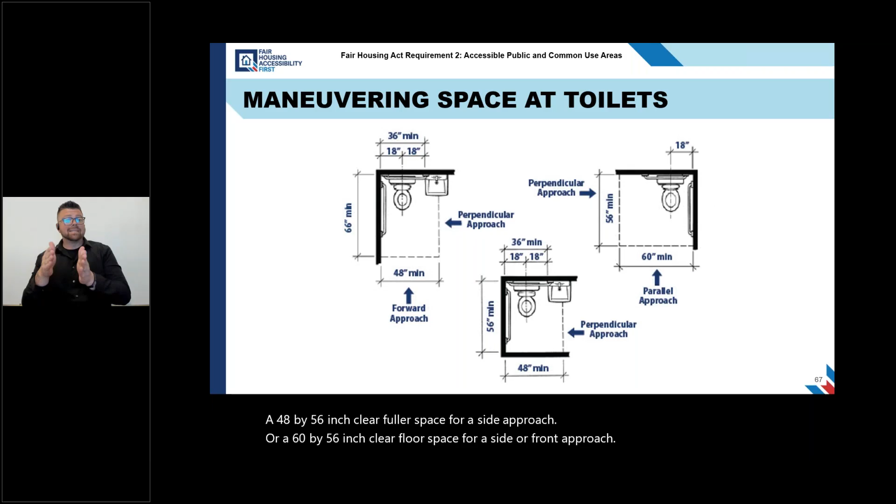Accessible toilet stalls. A 60 inch wide toilet stall accommodates most users. The floor space allows a person who uses a wheelchair to maneuver into the best position to transfer onto the toilet. It also provides space for an attendant, if needed, to assist the person with a disability.

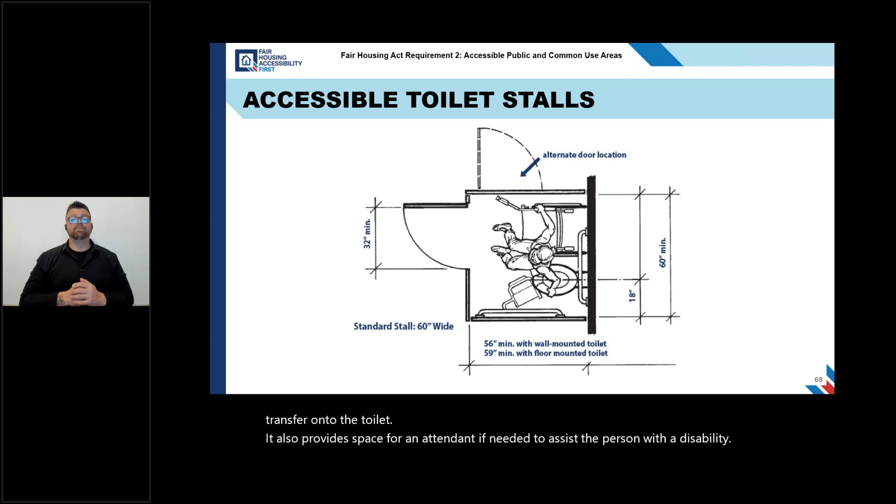Large toilet rooms. A sample plan for a large toilet room is shown here, with multiple toilets, lavatories, and urinals in the men's room. Each room shows a standard stall and an accessible lavatory. Additionally, the men's room includes a wall-hung urinal with an elongated bowl.

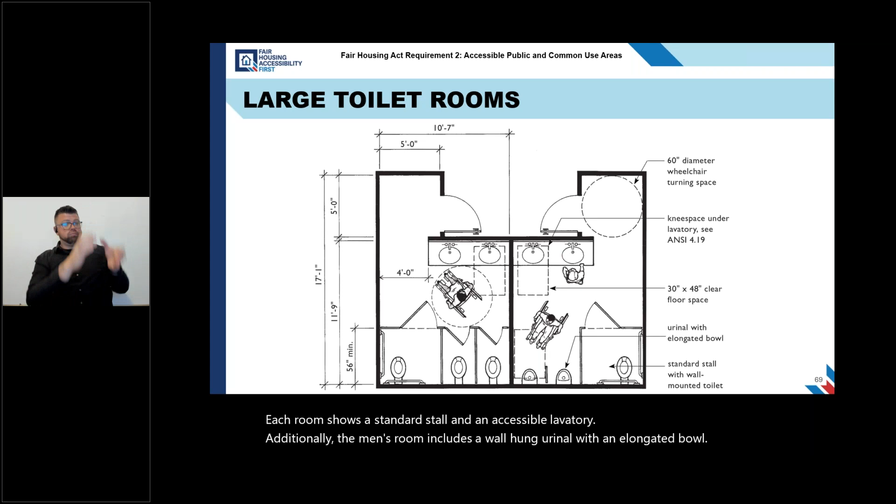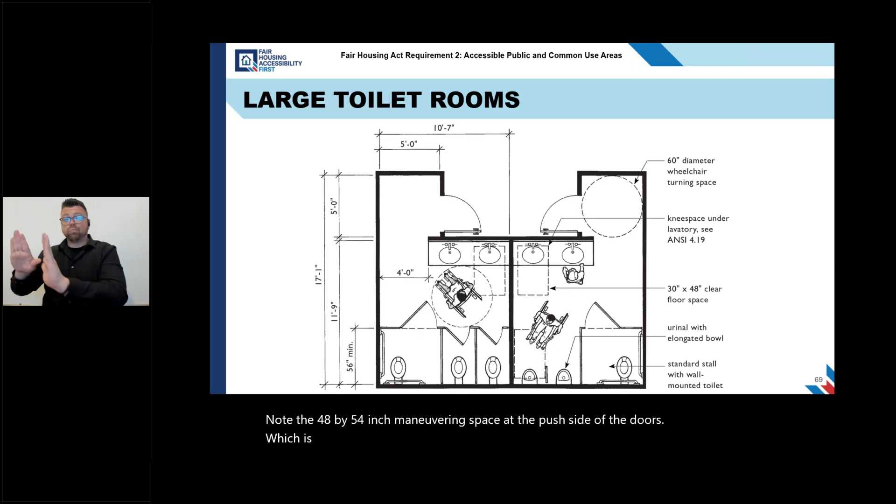Note the 48 by 54 inch maneuvering space at the push side of the doors, which is equipped with a latch and a closer to permit a push side approach to the door. Within each bathroom, there is also a 60-inch diameter maneuvering space. The guidelines require that at least one of each fixture type provided in a toilet room be accessible.

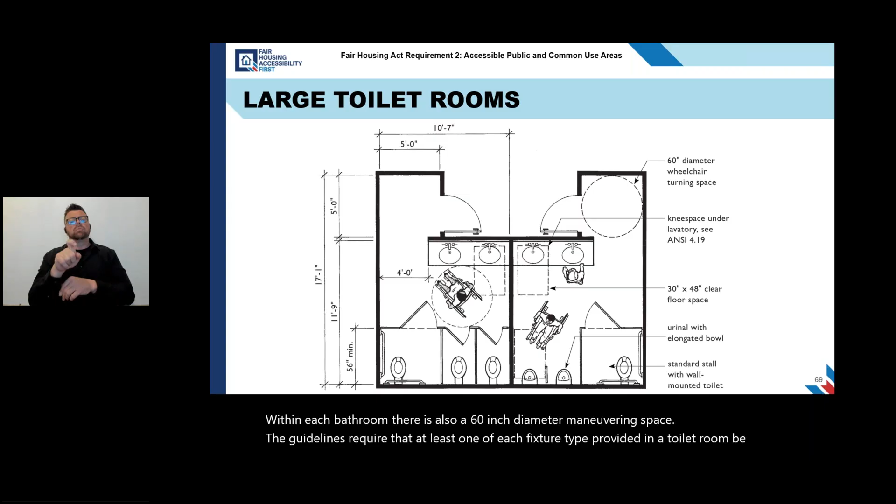Small toilet and dressing rooms. If showers are provided, for instance, in a toilet room adjacent to a pool area, at least one must be accessible and comply with the shower stall standards in ANSI. This sample plan shows a 36 by 36 inch transfer shower with a 30 by 48 inch clear floor space parallel to the shower, beginning at the control wall.

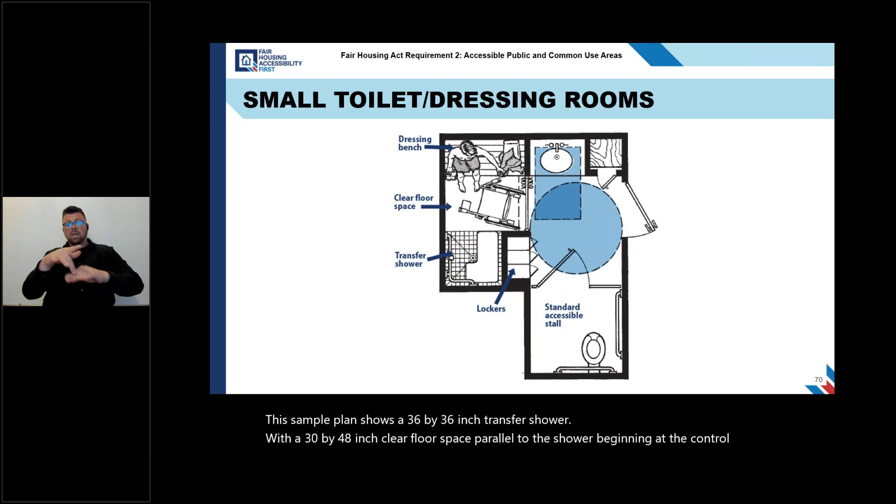Other features shown in this plan include an accessible lavatory, a standard accessible stall, a 60-inch maneuvering space within the room, and lockers on an accessible route.

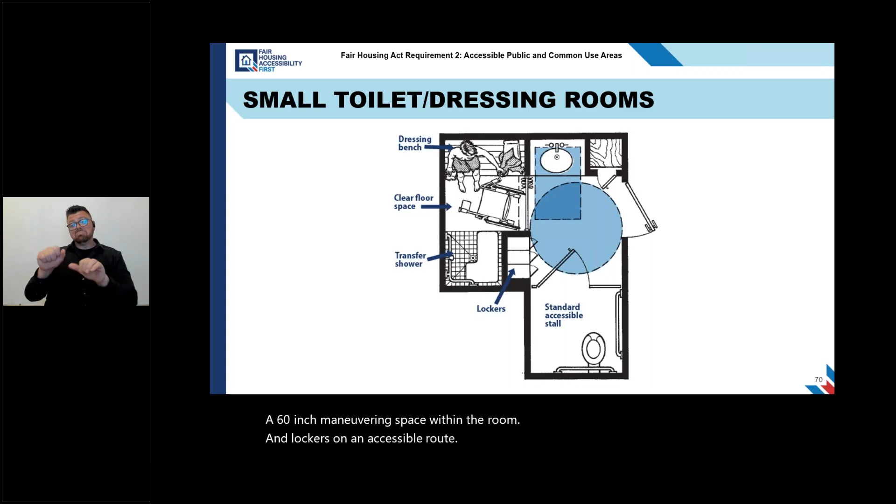And with that comes our final knowledge check. What is the width of a standard accessible toilet stall? Your first option, 48 inches. The second option, 60 inches. And the third option, 52 inches.

So go ahead and launch this final poll. And again, this reads, what is the width of a standard accessible toilet stall? The first option, 48 inches. The second option, 60 inches. And the third option, 52 inches.

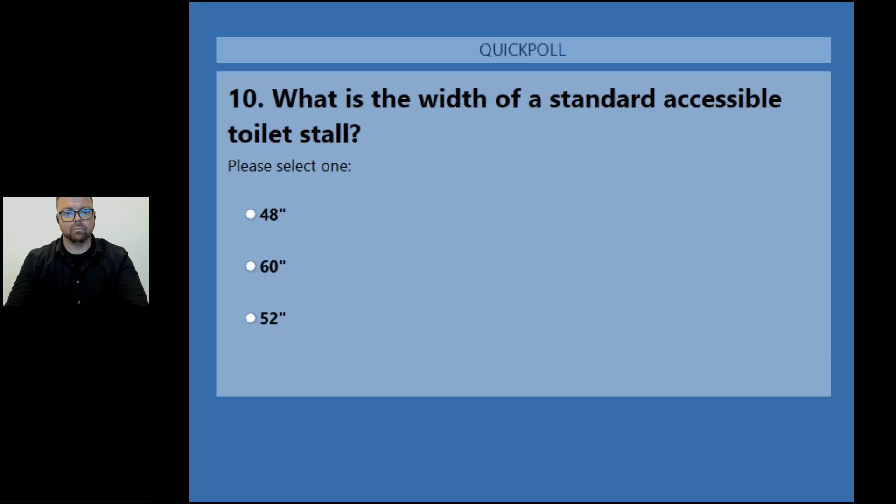All right, give a few more moments to get your selections in. All right, thank you so much. Go and close this poll. Thank you for participating in that. And now for our key takeaways.

When bathing facilities, shower rooms, urinals, stalls, and similar personal care spaces are provided, at least one fixture of each type provided must be accessible per room. Public toilet rooms must have knee space at sinks and pipe protection. It is recommended that grab bars in public toilet rooms be mounted between 34 and 35 inches to allow a margin of error.

Public toilet rooms must have usable faucet handles, lever style, that do not require gripping or twisting. Mirrors in public toilets must be mounted with the bottom reflective edge no higher than 40 inches above the finished floor. It is recommended that paper towel dispensers, soap dispensers, coat hooks, and other accessories in public toilet rooms be mounted at 44 inches.

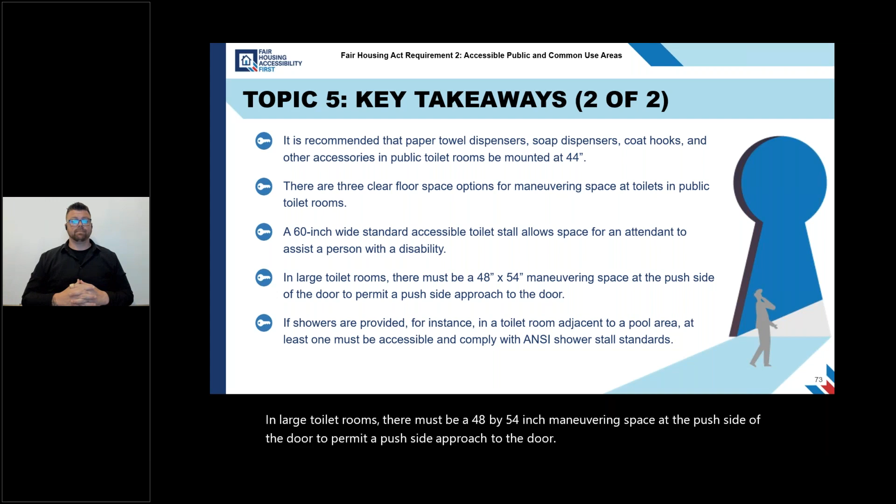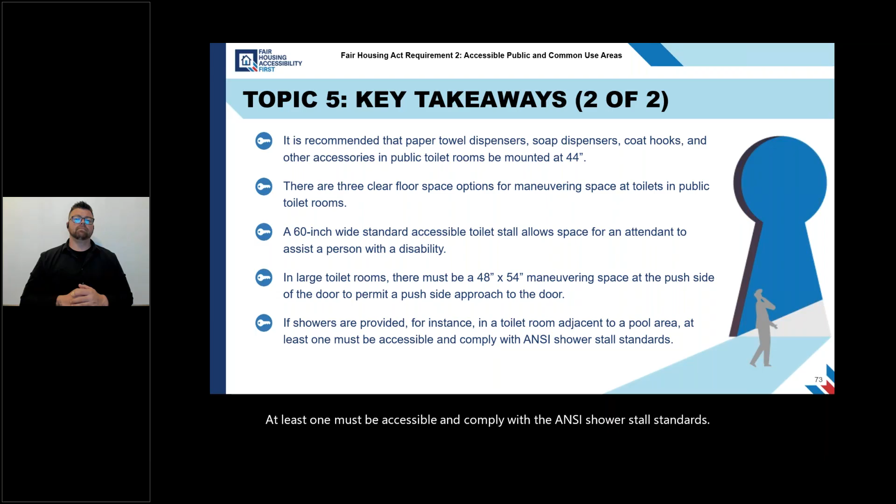And lastly, if showers are provided, for instance, in a toilet room adjacent to a pool area, at least one must be accessible and comply with the ANSI shower stall standards. And with that, we are now at the Q&A portion. So I will read the questions that we had come in, starting with Iris.

Could you please show the differences when a residential complex includes some commercial and or office areas and or employees for administration or in-house management or in-house maintenance areas? Eric? Thank you for that question. I think that's an important question.

So the Fair Housing Act guidelines require that public and common use areas be accessible for persons with disabilities. Portions of residential sites that are used by residents and their guests are considered common use areas that are covered by the Act. Employee areas such as management offices, employee lounges, restrooms, storage, and maintenance areas are also considered common use areas, and they must comply with the Act.

The portions of mixed-use projects containing commercial areas and office areas that are available for use by people other than residents and their guests, such as commercial and office suites, are not covered by the Act. But if they meet the definition of a place of public accommodation and or commercial facility as defined by the Americans with Disabilities Act, they will be covered by the ADA.

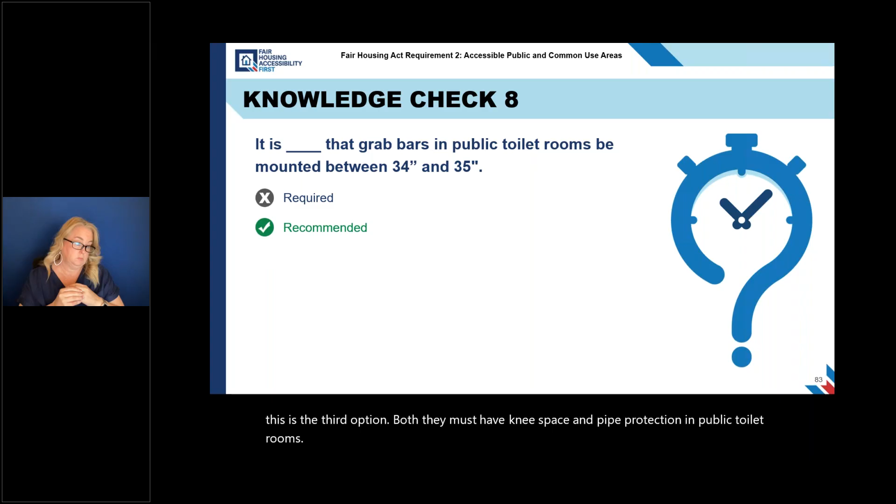Moving on to knowledge check 6. A public use U-shaped kitchen must have, and the correct answer was the third option, 60-inch turning space or a T-type turnaround. Moving on to knowledge check 7. Which feature or features must sinks in public toilet rooms have? And the correct answer for this is the third option, both. They must have knee space and pipe protection in public toilet rooms. Knowledge check 8. It is, and the correct answer was the second option, recommended that grab bars in public toilet rooms be mounted between 34 and 35 inches.

Knowledge check 9. Mirrors in public toilets must be mounted with the bottom reflective edge no higher than, the correct answer was the second option, 40 inches above the finished floor. And then for our final knowledge check, what is the width of a standard accessible toilet stall? And the correct answer was the second option, 60 inches.